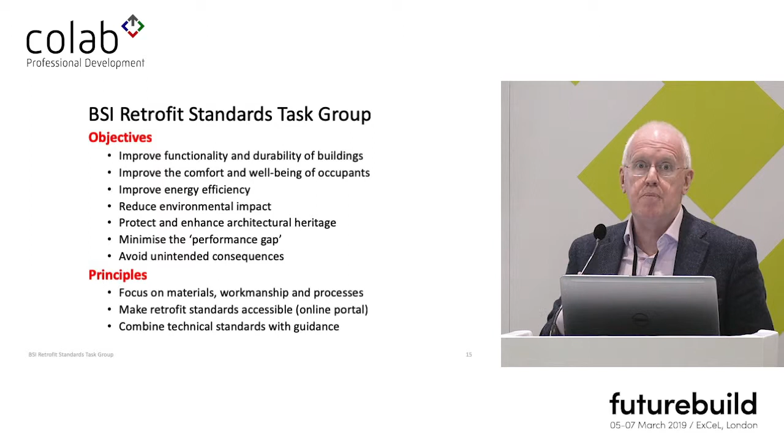And we also took a decision in principle that we would combine technical standards with guidance. So PAS 2035, as you'll see, contains many elements that are not normative requirements of the standard. They're guidance about how to do things. And we're also adding to the standard online click-through guidance to start to enhance that process. So we're trying to make the whole process less opaque to the user and more accessible to the user.

This is what the Retrofit Standards Framework looks like. At the top there, you see the same stuff that Phil was just showing you, just reproduced in a slightly different way. So we have the Each Home Counts quality mark, TrustMark, at top center, and their code of conduct and customer charter on either side, both of which also came out of the Each Home Counts review. And then the middle box is the first product of the Retrofit Standards Task Group, if you like. It's the overarching end-to-end new domestic retrofit standard called Publicly Available Specification 2035, PAS 2035, Retrofitting Dwellings to Improve Energy Efficiency, Specification and Guidance.

And then that's not the end of the story, though, because it's only the overarching standard for the framework. There will be more, and there already is more, in that PAS 2035 refers to 3 types of other standards, and by referring to them, it makes them mandatory for compliance. So it brings in lots of other standards from out there as part of the retrofit standards that apply to projects. So on the left-hand bottom box, other BSI standards, typically PAS 2030, which is the installation standard, BS 5250, which is the condensation standard, BS 7913, which deals with conservation of historic buildings. So all of those are brought in, and many others, into the picture.

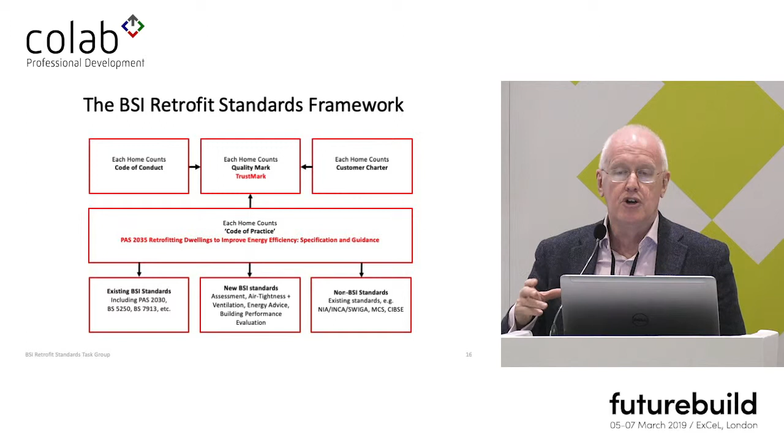But PAS 2035 itself, that's its title, it applies to any domestic retrofit project, not just to ECO. Anybody procuring domestic retrofit work, whether it be a householder or a housing association or anybody else, the government can require the use of PAS 2035, and that will be right away from publication in the middle of May this year. It may not be coming into ECO for another 19 months, but we will be able to apply the standard.

PAS 2035 must be used in conjunction with PAS 2030, which is the installer standard. The installer must have a PAS 2035 compliant design, and the PAS 2035 compliant design must be installed in accordance with PAS 2030. So the two standards are inextricably locked together. And PAS 2035, as I've already said, requires the use of many other framework standards.

For compliance, every project has to have a retrofit coordinator. That's a requirement of PAS 2035. And Phil mentioned retrofit coordinators, and I know that Russell's going to do the same. So they're central to our argument about quality in retrofit, having a retrofit coordinator.

The retrofit coordinator is a kind of expert retrofit project manager, specially trained and qualified, and they're responsible for ensuring that PAS 2035 is complied with, and they're also responsible for protecting the client's interest and the public's interest. And one of the things that we've never had in this industry is somebody whose job is to protect the public interest. So we need that.

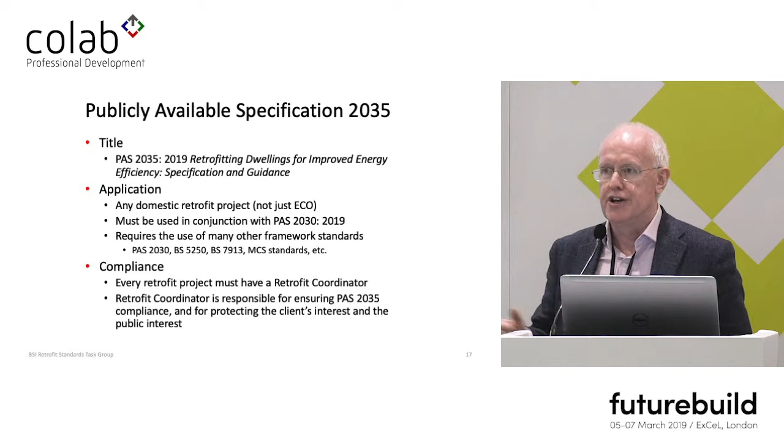But essentially, the project starts with the appointment of the team, and principally the retrofit coordinator, as well as the advisor, the assessor, the designer, the evaluator. And that's done in response to a risk assessment. The risk assessment determines two things: which of three paths through the PAS, paths A, B, and C, the project should follow according to how technically risky it is, and what qualifications the various members of the professional team are required to have. And the more risky the project is, the more onerous the path is, and the more qualified the people involved have to be.

Once the risk assessment's been done, there is a whole dwelling assessment, including a ventilation assessment to be carried out. And if it's a building that's traditionally constructed or protected, there's also an assessment of its significance under BS 7913.

Once those things are done, there is an improvement option evaluation required, so that we're forcing the team to look at what are the options for this home, what things should be done to it, and what are the best improvement measures. So no longer will it be possible for somebody to come over the horizon with a bag of money labelled ECO or EWI, and that's what you get, because that's what the money's for. Now they have to assess what are the appropriate things to do to this dwelling.

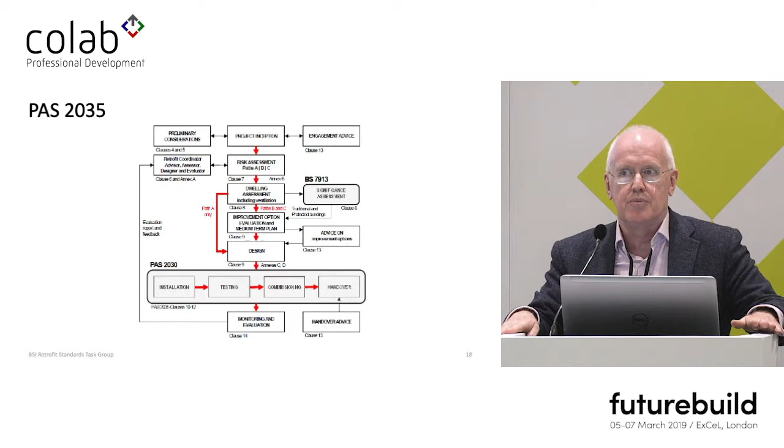I just wanted to dwell a little bit on the risk assessment that starts the whole process off. It's carried out by the retrofit coordinator. It's based on what we call triage data. You don't necessarily have to go to the dwelling to do the risk assessment. You can collect data from EPCs and other databases and Google Earth and Google Street View and things that you're told by the client. And it's done before the dwelling is subjected to the whole dwelling assessment and its ventilation assessment.

When you do the risk assessment, you arrive at path A, path B, or path C through the PAS itself. And that depends on 5 criteria: the number of dwellings in the project, the number of measures in the project, the construction of the buildings, the built form of the buildings, and out of those 5 criteria arise differentiation into the 3 paths. And as you might expect, the highest risks go with high-rise buildings, traditionally constructed buildings, and protected historic buildings. Traditionally constructed buildings are at least in path B, and high-rise and protected buildings are always in risk path C, and they get more attention.

So the assessed risk determines the qualifications required by the assessor and by the designer, and where the buildings require specialist skills on behalf of the assessor or the designer. Perhaps they're traditionally constructed, perhaps they're protected, perhaps they're high-rise, perhaps they're vulnerable for other reasons, then those additional qualifications are brought into play.

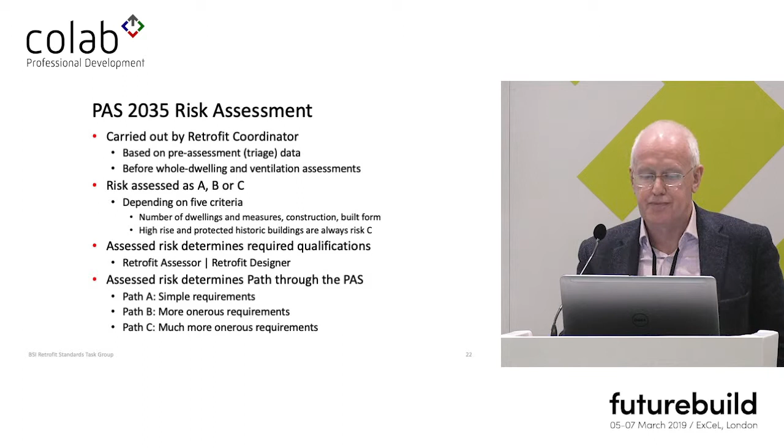It includes understanding the building's context, understanding the building's heritage, its construction, its condition, identifying constraints on things that might be done, looking at the defects that are there and how they might be fixed before any retrofit work is done, and then doing a proper survey to establish the heat losses and the efficiencies and all those kinds of things so we can model the building's performance properly. And that includes an occupancy assessment so we can tailor the modeling to the actual occupancy if required.

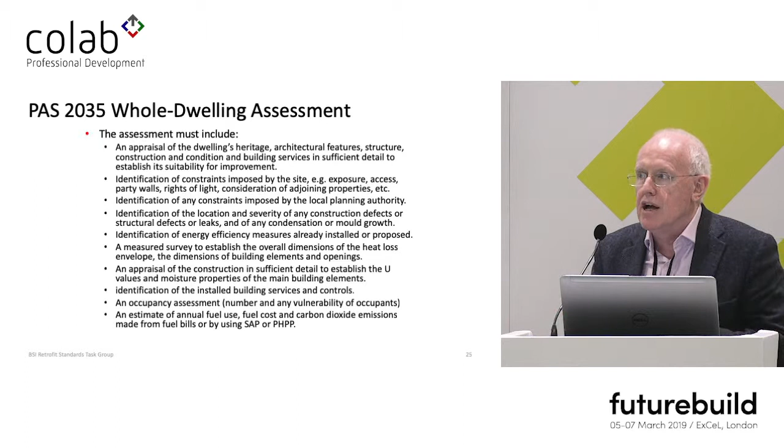There's also a ventilation assessment, which is in Annex C of the PAS. And what this says is that whenever we go into a dwelling, we must assess whether the ventilation is adequate. And inadequate is evidenced by there being some condensation and mold present in the building, or it has no working ventilation system, or an incomplete ventilation system, or if it is intended by the retrofit project to improve the air tightness, the air permeability, below 5, then intermittent ventilation or passive stack ventilation is deemed inadequate.

If the ventilation is assessed as inadequate, then the designer must include an upgrade of the ventilation into the PAS 2035 compliant design. And that upgrade says that if the air permeability is going to be more than 5, then it must have a fully operative, complete intermittent extract ventilation or passive stack ventilation system. If the intended air permeability is going to be less than 5, the new dwelling must have a continuous mechanical extract ventilation system, MVHR or a PIV system in place.

It also says in the standard that the system capacity must not be the minimum capacity specified in Building Regs Approved Document F. It must be based on full occupancy of the dwelling to provide adequate ventilation capacity, and it must have demand control to ensure that the capacity that the system delivers is consistent with the actual demands room by room in the dwelling. So we're looking for more effective ventilation systems.

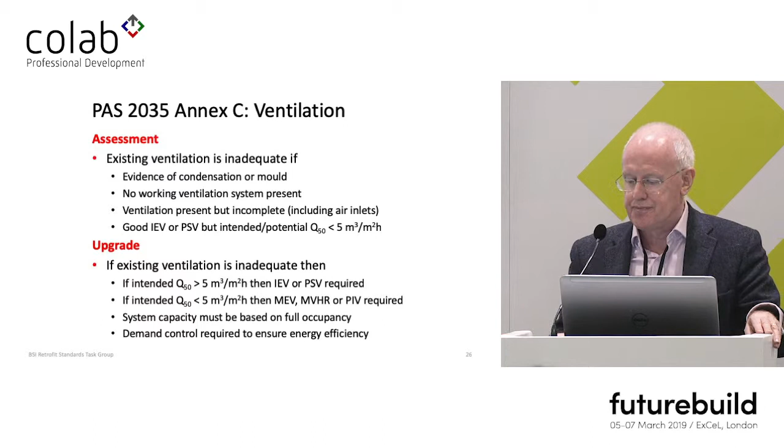In the design, path A, the simplest path, allows for the design of single measure system-based improvements by specialists. And so the specialist designer of, say, an EWI system can design the project, but it has to be, it says approval here, but that's wrong, it has to be reviewed by the retrofit coordinator to ensure that it's suitable for the dwelling.

At path B and path C, we require the improvement option evaluation and the medium-term retrofit plan, and they can be based on a SAP assessment or a PHPP assessment. And the medium-term retrofit plan has to identify and prioritize the improvements that the dwelling would need by 2050, even if they're not going to be put in as part of the immediate project. It's to inform the occupants, the owner of the building, what things need to be done over the next few years. And it's the basis of Phil's building passport.

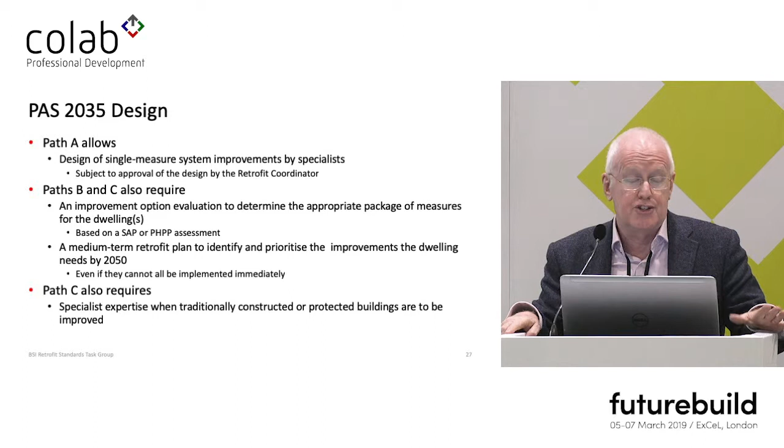And then path C mostly looks at very high-risk buildings and nearly always requires specialist expertise in traditional buildings and some professional qualifications in dealing with buildings with historical significance. Still on design, this is the scope of the design. It depends on the risk path, but basically all these things need to be taken into consideration. Not least providing for the outcomes agreed with the client, pretty important.

It has to be based on the assessment, it has to take account of the architectural heritage context, it has to take account of planning and building control requirements, it must allow for the management of moisture in the building, both inside the building and in the building fabric. It must include construction details for the corners, junctions and edges, because we know from experience that that's where retrofit goes wrong, where things meet. It must include a ventilation upgrade if required, and it must specify requirements for testing, commissioning and handover, and finally it must specify what guarantees and warranties are required.

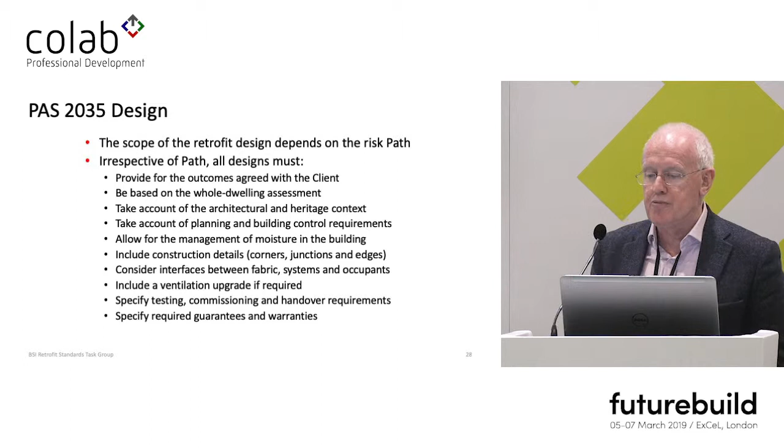And the interfaces are dealt with by a mechanism in the standard called the measures interaction matrix. And again, I know you can't see this, it's essentially a table of all measures against all measures. And it has 4 colours in it. If you have a combination of 2 measures or more in your project, if there's a yellow box at the intersection of those 2 measures, you must draw a construction detail of how that junction is handled. So that might be the edge of an insulation layer, a junction between an insulated roof and an insulated wall, something of that kind.

If there's an amber box at the intersection of your 2 or more measures, then that means that they don't maybe physically meet, but they do require compatible specifications. So that would be, for example, that the ventilation system is specified to match the air permeability of the envelope, or that the heating system and its controls are specified to match the new reduced heat loss of the retrofitted dwelling. If there's a green box, it means those 2 measures don't interact, so you don't have to worry about it. And if there's a red box, you shouldn't be doing those 2 things together.

That's the kind of banned box. If it's red, don't do it. So it's things that are technically incompatible. And you can get this from the BSI website. It's been around for PAS 2030 for a while, so if you want to inspect it and see what it says in detail, it's there for you.

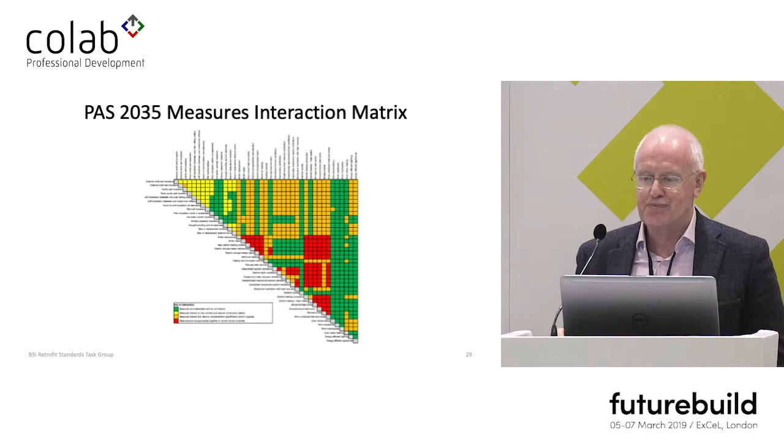When we come to installation, the installation must comply with PAS 2030, and there's a new edition of that which we've updated, 2030:2019. The retrofit installer must work to a design that's compliant with PAS 2035. And PAS 2030 includes requirements for validating the design, preparing a method statement, ensuring that qualified or competent operatives are employed on the job, making a pre-installation building inspection to ensure that the work is capable of being carried out, the actual installation process itself, and that's specified through many dozens of annexes, procedures for testing, commissioning and handover, as in the design, provision of guarantees and warranties as requested by the design, and record keeping for the whole process.

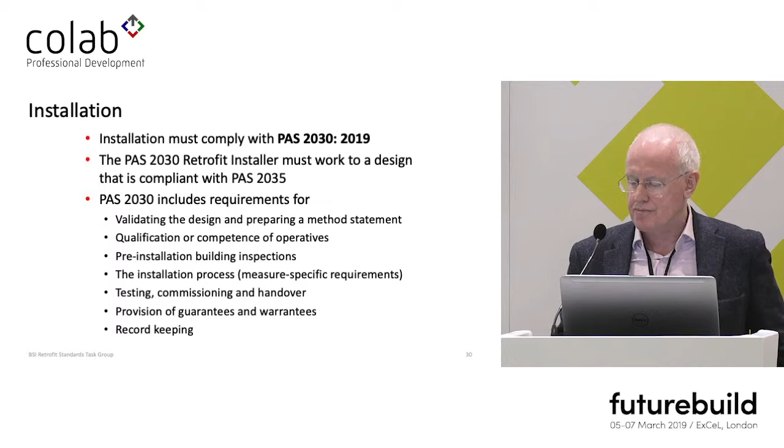Once the installation is complete, we come back to PAS 2035 and we have a monitoring and evaluation process, the objectives of which are to confirm that the intended outcomes have been achieved and to identify any unintended consequences. Basic monitoring is simply a questionnaire that says, have we done these things? It confirms the outcomes and the customer's satisfaction.

However, if the customer is not satisfied or the outcomes are not consistent with the intention, then intermediate monitoring and subsequently advanced monitoring can be invoked in order to further investigate the problem and get to the bottom of it, and if necessary, specify the appropriate redress. So we're not going to let people get away with shoddy work. And clearly the outcomes of the monitoring and evaluation process are going to be of interest to Trustmark in this whole process.

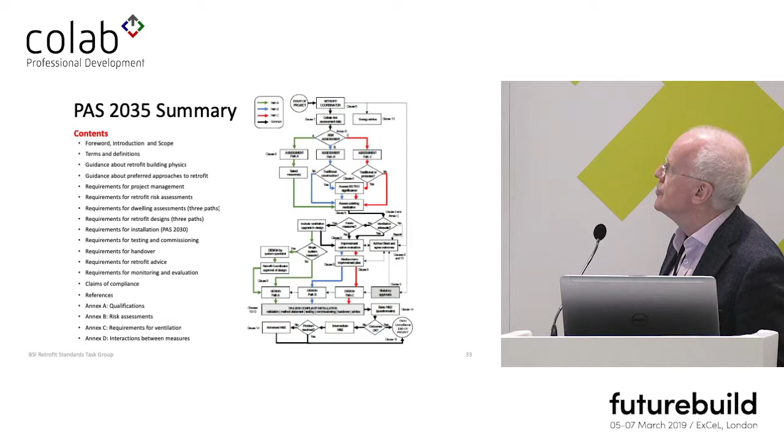So finally, PAS 2035 actually in reality looks more complicated. This is the complicated flowchart. I'm not going to take you through it, but we spent much blood and tears producing this, understanding it. On the left there you've got the contents of the standard, the contents page summarized. And this is the actual flow with colours used for the three paths that you would follow through the PAS to deliver a retrofit project, with the retrofit coordinator starting right at the top.